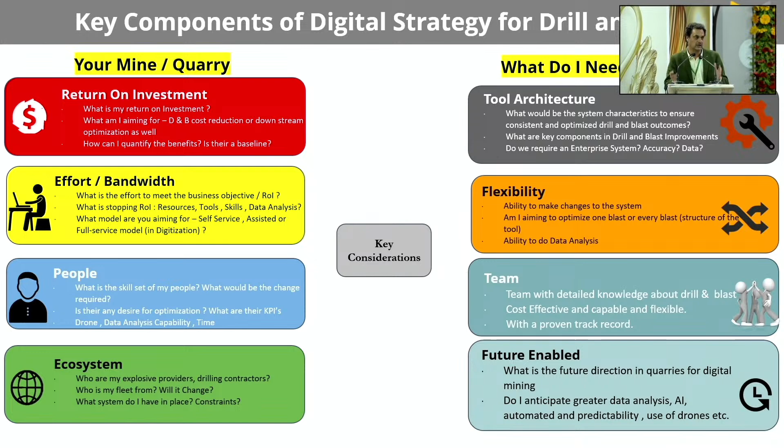So these are some key components of digital strategy. Return on investment, the proper efforts should require, we need to identify the proper people, the ecosystem - who are our drilling contractors, the explosive suppliers. We need to understand all of them, what are the constraints at the site. Then we need to finalize our system, what system we require that can give the benefit to us.

Now we will talk about the digitized drill and blast platform. As far as what we are currently doing, we are just following the current patterns, whatever is there. No drill and blast design, new innovations are very less, and we are not considering the proper rock properties due to certain reasons. So we need to consider all of them.

So in future what we can do, we can consider the geology of the rock, explosive properties, and the design should be based on all these factors. Then at the same time of design, if we can check our outcomes - like vibration, in some cases the vibration is going beyond the limit, the nearby villages are there - we can check how much vibration we can get, control it, and improve safety also. In case of fly rock, fragmentation, each and every aspect, all outcomes we can check while designing through our platforms.

You can see the drill and blast cost is very less compared to the overall mining cost. So we are not saying that we will reduce the drilling and blasting cost. We need to optimize this system because all the downstream operations depend on how your blast is performing. So our main aim is to minimize the overall mining cost, optimize our drill and blast operation, and control the environmental impacts due to the blasting.

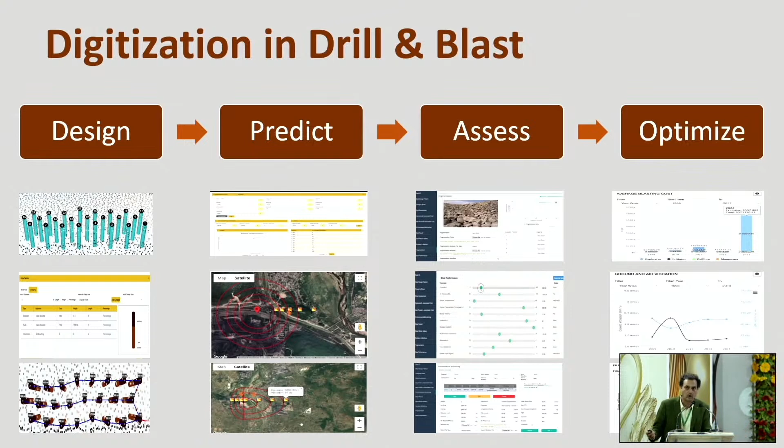So in our software we are providing 3 modules. Blades - in that we can design a blast, and while designing, as I told, we can predict the fragmentation, ground vibration, air vibration, and if any parameter is going beyond the limit, then we can change certain parameters and get it within the limits.

Then after the designing, the blast drilling operation can be monitored in the DRIMS software. After completion of the drilling, again we can generate the charging sheet through the BLADES software, and post-blast record - all blast records can be kept in the Blast Information Management System, BIM software. So this is covering the entire blasting life cycle - you can design, you can monitor, you can keep the record, all at one place.

This is a higher level integration. You can see we can design and directly export the coordinate of the hole to the drilling rig, and if the drilling rigs are capable of drilling with accuracy, with a high precision navigator, it can drill without intervention of any measuring burden and spacing anything. Then we can monitor whatever drilling information, all the information through the MWD data we can collect.

We can design our charge according to the hardness of the rock, and after designing the charge, the charging sheet can be directly exported to the explosive truck, and the truck can deliver the explosive exactly at the particular hole we have designed. I am feeling proud to announce that this system we have already implemented in South African coal mines.

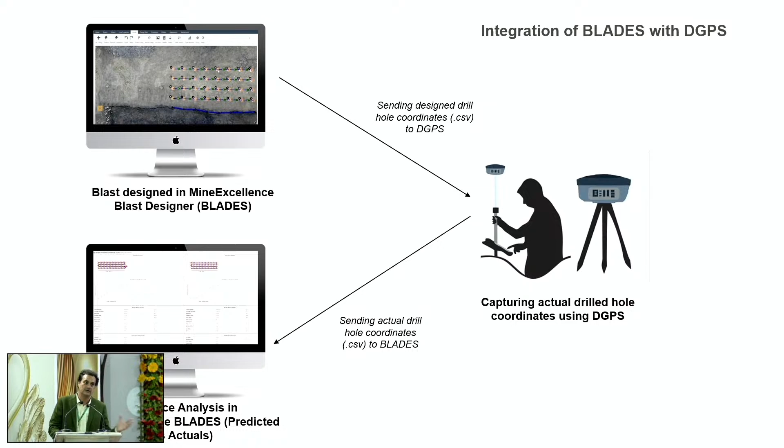This is a very good system. If we know how much we have deviated, we can control over them, and based on the deviation we can generate the charging sheet accordingly. Whatever variation, whatever changes we require, we can do it prior to the blast.

Front row burden - this is a very important thing. It is more responsible for fly rock and for utilizing the proper explosive energy. Now in present practice, we are just identifying manually how much the crest toe is, and how much the front top toe burden is.

Then we are adjusting our hole. But in this system, by just clicking on your hole, at intervals of 5 meters you can get how much front burden is there, and accordingly we can place the charge.

In some places undercuts are there, so maybe fly rock is the main cause of that. We can avoid it by putting some decking, and at the bottom put some heavy charge, adjusting our hole accordingly. We can set our minimum burden and maximum burden in the software, and then the software can auto-adjust the burden in the front row.

Time window - in the case of non-electronic connections, each hole is thought to be blasting at a time, but whatever holes blast within 8 milliseconds, researchers tell us it will generate the same vibration effect as if they are blasting together. This time window clearly tells us what is what. Here you can see a maximum of 4 holes are blasting altogether within 8 milliseconds.

So if we are more vibration cautious, if any nearby villages are there, we can check at each spot and change the delay, and reduce it to a single hole blasting within 8 milliseconds.

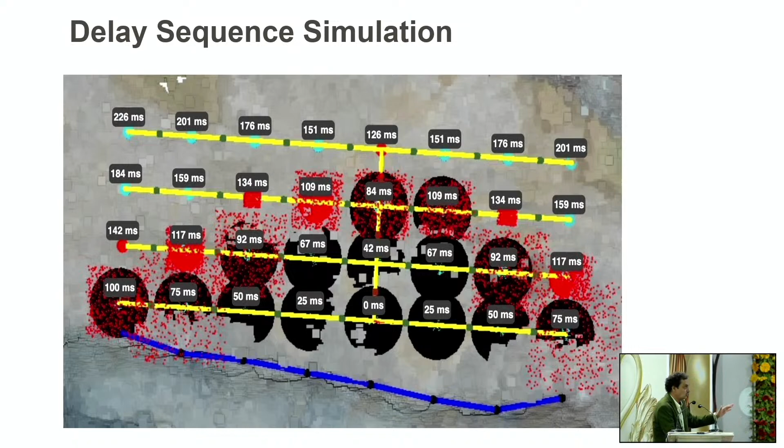The time contour shows in which direction you want to move your muck. This is very important for ore dilution also - we can control in which direction the free face is available, where we need to move our muck. That can all be adjusted prior to the blast, and that is the important thing.

There are some case studies from Indian coal mines only, but presently we are working here, so we are interested, we are working with your expertise team, and we will make a case study like that, where we can show the case studies of the local mines, how much we can save.

So these are some operational benefits. Beyond the operational benefits, we are improving safety also. We are controlling the environmental impact also, and cultural improvement is also there.

So I would like to thank NCL, SCCL, Coal India, Accenture for awarding this contract to us, and we are implementing this at all 7 mines, and now we are committed to the successful implementation of this program, and hopefully we will implement it in all Coal India mines. Thank you. Thank you.

Next speaker's topic is advanced technology in SLI enabling safe working environment. Hey Bhartu sir. Yes sir, as the topics are different, can you put a question answer immediately after the topic? Okay sir, so any question related to this paper?

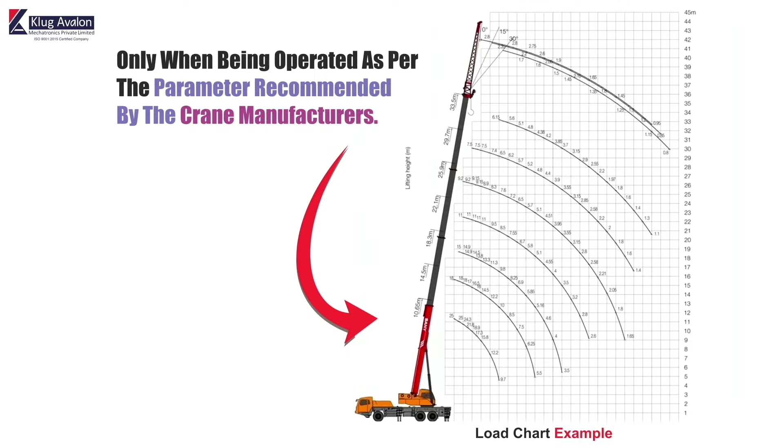When all these parameters are followed as per the load chart provided by the manufacturer, only then is the crane safe. Can this be judged by an operator? The answer is no, because an operator cannot judge the radius, the actual load he is lifting, the safe load it can lift at that radius, or at what angle he is lifting. He is not able to judge all these parameters by himself.

So what is the solution? This incorrect judgment can lead to loss of human life, damage to the crane, and damage to the material. And when he is not in a position to judge properly, his efficiency and productivity also go down, because he is judging everything himself and probably those details are not with him.

So that is what we are providing solutions for. Crane operation depends on the operator's judgment, which may or may not be in line with the parameters decided by the crane manufacturer. So what is the solution?

That's why we have various sensors, and a display mounted inside the operator's cabin, where he can see all the parameters given by the crane manufacturer, such as boom length, the radius at which he is lifting the load, the boom angle, and the exact load he is lifting versus the safe permissible load at that radius. All this data is displayed, so the operator is very confident while operating the crane or any lifting equipment.

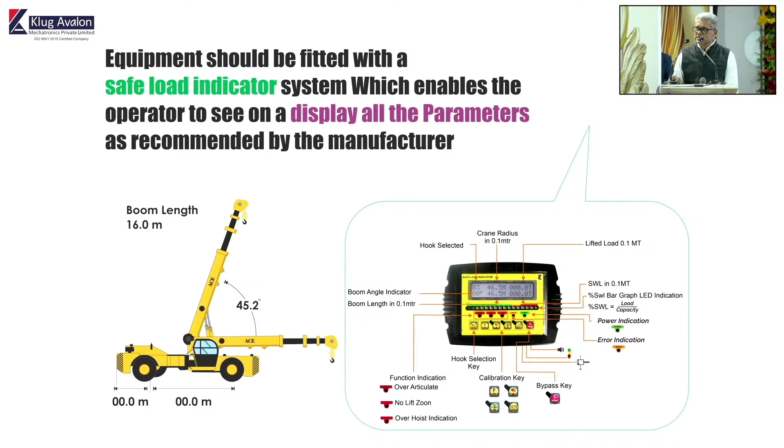This basically enables him to have a very safe operation as designed and described by the crane manufacturer. We are working on various other solutions also for excavators, front end loaders, and onboard weighing, but it is under process. Maybe in 6 months or a year we will be able to offer all those things to our customers.

This is our factory with various sensors. One thing I'd like to mention is all these sensors are developed, designed, and manufactured by us in-house. I'm showing all the different sensors we manufacture.

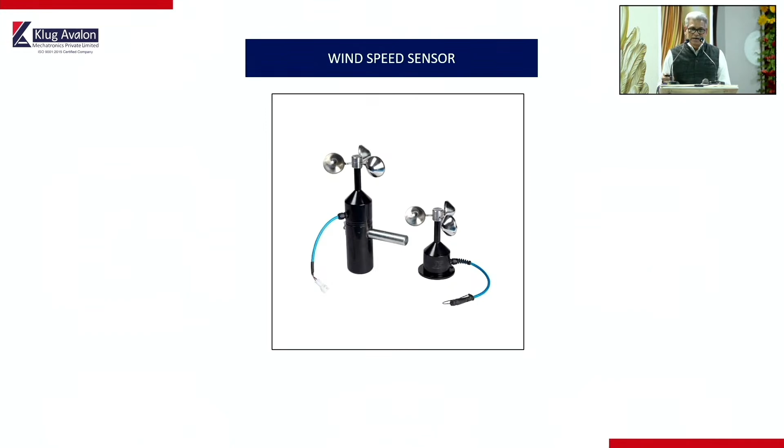These are used for different kinds of applications: this is a load, length, and angle sensor. Wind speed sensors, because for many tall, long-boom cranes wind conditions matter, so we provide wind speed sensors too, along with limit switches.

This is the HMI display I already showed you, and this is the big display we provide for EOT cranes. Right now we're talking about mobile cranes mounted on tires or crawlers, but we can also offer solutions for EOT cranes, gantry cranes, and forklifts.

For such cranes we use these big displays, which enable the operator or anyone operating the crane to see the exact load being lifted and whether it's within permissible limits. When an overload condition occurs, there's also an automatic cutoff system so that overloading is avoided.

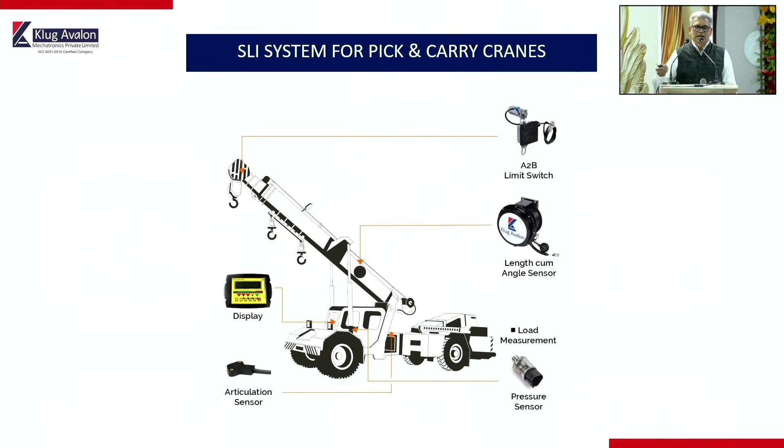These are the various cranes I'm showing. This is a pick and carry crane, mostly popular and used in Coal India and similar places. These are truck-mounted cranes, also called truck cranes or telescopic cranes. We have various solutions available for these.

We offer OEM supplies as well as retrofit solutions, because many old cranes are fitted with imported systems. We can replace these with our indigenous system, which is very cost-effective and can support you for 8 to 10 years without problems.

Crawler cranes, this is a tower crane. We can also provide solutions for forklifts. These are the EOT systems I mentioned, and we showed the gantry crane design, but this can be used for EOT cranes as well. This is an EOT crane.

Someone just now spoke about IoT. We have systems where you can get all the data on your mobile phone. We have developed that kind of system too - you can see the data yourself on mobile and put it on the cloud. So you have accessibility to the data also.

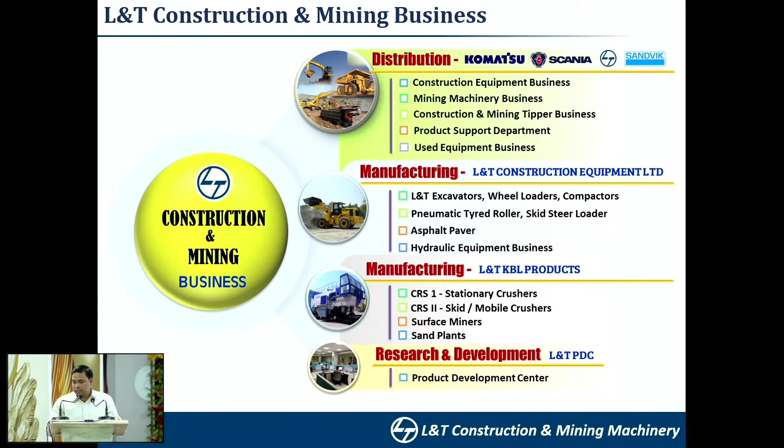We are offering Komatsu machines to NCL. We are procuring these machines globally, from major locations in Germany, America and Japan.

This is our comprehensive range for the Komatsu equipment we are selling in India.

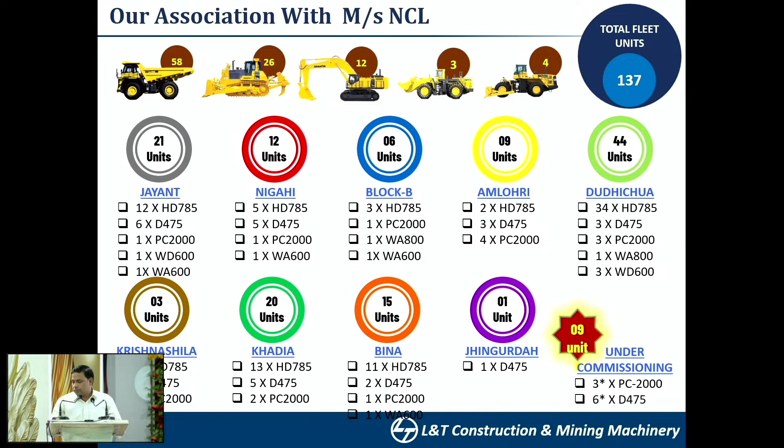26 dozers are operating in NCL, and 58 dump trucks are operating in NCL, which have the highest SMR of 40,642, with an average availability of 93%.

This is the inauguration ceremony at Amlohri project, which we have recently done.

This is Dudhichua, and this is the machine which was supplied first in NCL, which has crossed 65,000 hours, a benchmark for us. We would like to thank you, especially NCL Gorbi and NCL, for providing this opportunity and taking care of our machines.

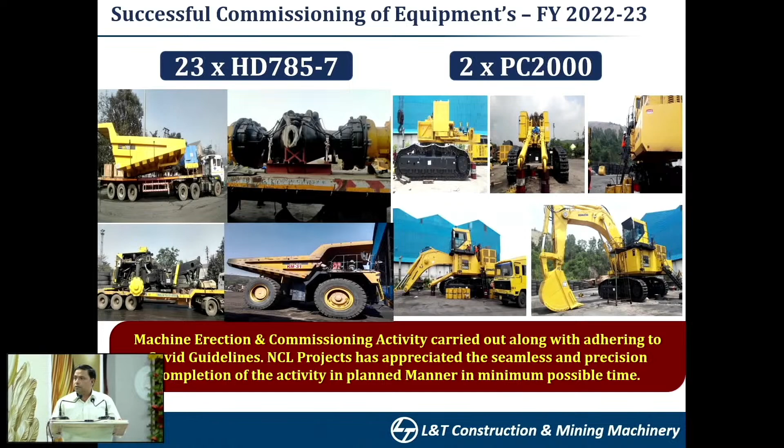Recently we have handed over 23 dump trucks and 2 PC2000 machines in the last financial year. Now we are commissioning 3 more PC2000 at various projects.

What facilities do our machines have? Onboard monitoring - if any fault arises in our machines, an engineer can go and do the monitoring on the screen. That is called onboard monitoring.

Komtrax Plus - we also have remote monitoring, this is vehicle health monitoring. We can take the data, download and analyze it automatically. We also have Komatsu oil wear analysis, which we do on a regular basis on the machines.

This real data is for operational improvement, for our mining tool, the mining operation tool. Komatsu undercarriage maintenance we do on a regular basis to predict the life of the undercarriage and avoid delay in part supply.

This is the sample for the equipment care which we are doing, based on data from the VHMS.

For the best parts availability methodology, we did a contract with the OEM called MDA. Through that, we have reduced the time for supply of parts and the procurement process also.

Various service contract options are available, like MARC, FMC, AMCs, parts contracts, rate contracts, and depot agreements. Various Komatsu tools which are very helpful for maintaining Komatsu machines - VHMS, KOWA, KUC, PM Clinic - we perform these on a regular basis on our machines.

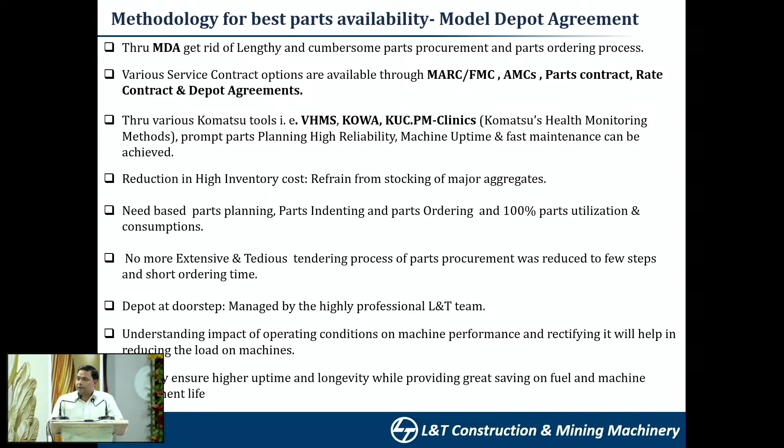Benefits of OEM based annual maintenance, as we are running with some contracts at NCL Gorbi, NCL Jayant, and some for NCL Bina also, where we are providing annual maintenance contracts.

For that, which kind of benefits does the customer get? 24/7 service they get from our side. In time parts planning, indenting, tendering, ordering, MDA, rate contracts, all done.

Deputation of model-wise product specialists. We have a product specialist for each machine who is very concerned about the machines. Model depot agreements with OEM for faster parts procurement and annual maintenance contracts with the OEMs. Doorstep availability of the OEM depot, as we have our depot very near Waidhan, close to NCL, from where we supply parts in a much lesser time.

We also have some advanced technology such as vehicle health monitoring system software, Komatsu oil wear analysis, Komatsu undercarriage life expectancy mapping, tire pressure monitoring system, rear view cameras, proximity sensors, anti-collision system, auto fire suppression, auto greasing to all critical areas, automatic payload monitoring system, and conversion kits.

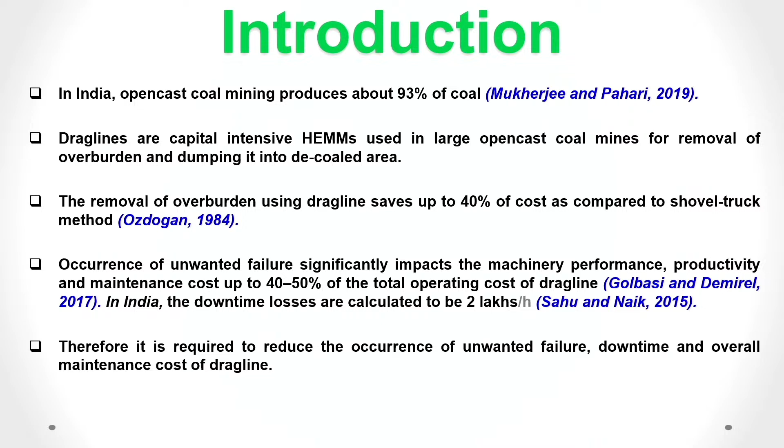First we have to talk about India - everyone knows that 93 to 95% of coal extraction is done by Opencast mining, and dragline is heavy, costly equipment, but it is the cheapest machinery to extract minerals, and it can save 40% of the cost as compared to dumper-shovel combinations. One case study reported that the total maintenance cost of the dragline is approximately 40 to 50% of the total operating cost of the dragline, and it is counted that the hourly loss of the dragline is approximately 2 lakhs. So therefore we need to predict the occurrence of fault and failure of the dragline to minimize downtime and overall maintenance of the dragline.

So now, everyone discusses Industrial Revolution 4.0 and everything, so we should discuss maintenance policy 4.0. This is the present requirement for every industry, to make the equipment well and provide fast maintenance policy using artificial intelligence tools, that can develop an automated, self-learning system that can predict the fault, diagnose the fault, and trigger maintenance actions in real time. Maintenance policy 4.0 includes the view of source of data, way to connect, way to analyze, and way to recommend actions of maintenance that can improve the reliability of the equipment.

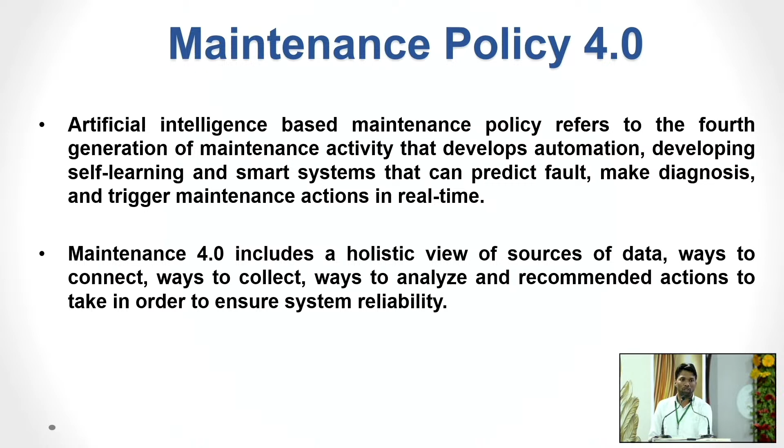In the real time condition, when we have to observe any evidence, that can directly feed into the network.

After that we have to do three different types of analysis: conflict analysis, sensitivity analysis, and fault type identification. In conflict analysis, when more than two evidences are observed at a time, we have to identify whether each evidence is supporting that particular part or conflicting with each other.

In fault identification, we have to develop reasoning to categorize the fault, like degradation fault or catastrophic fault. Sensitivity analysis is used to identify the most responsible parameter that affects, or is most responsible for, the occurrence of the fault.

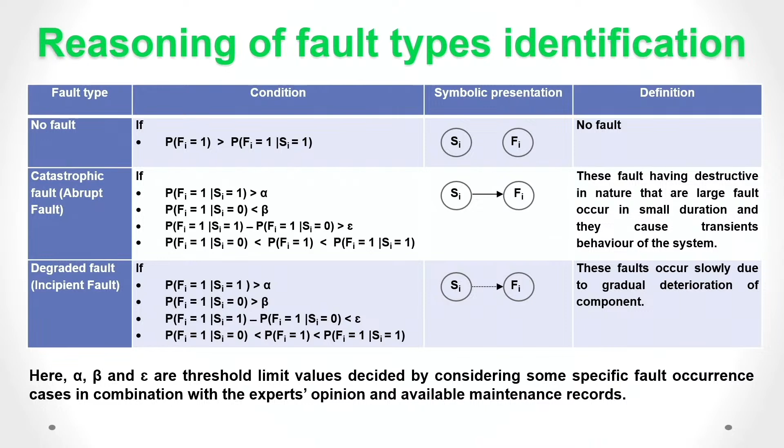When any type of fault occurs in the system, we have to do fault inference. So this is the reasoning used to identify the fault.

We have to develop the reasoning based upon the trial and error method. We give some random values, and based upon whether the real observations are valid or not, we have to decide the threshold limit that can describe the degree of detection of the fault, like alpha, beta, and epsilon.

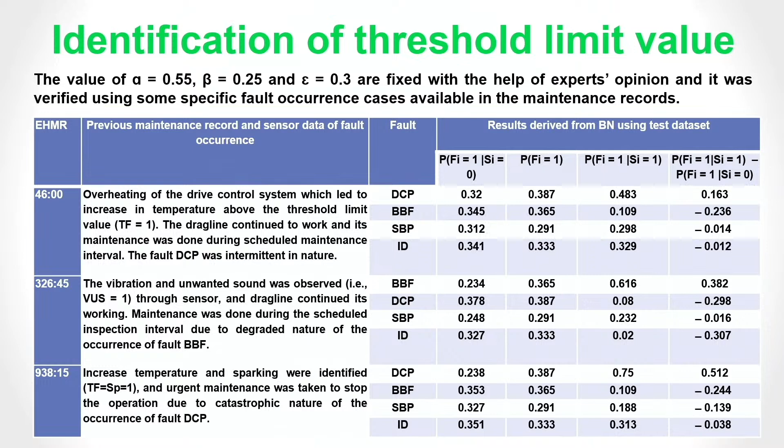After that, we have to validate the model, and in one of the cases we observed that one of the symptoms had to be identified.

Based upon that, we make a reasoning, and conclude that the fault occurring in the bearing is a degraded fault, and we suggest maintenance actions that can be taken within the PF interval, the potential to failure interval of the component.

A negative conflict value indicates the model is valid and the observed evidence is not conflicting with each other. Then, after doing the sensitivity analysis...

we have to fulfill 3 different objectives and identify the most critical parameter that can affect the occurrence of the fault. This is the objective that we have identified based upon that.

After that, we have to validate the model using the data set. One data set is used to develop the model, and another data set is used to validate the model. The percentage of accuracy of the developed model is 92%, and the error identified is 9.20%.

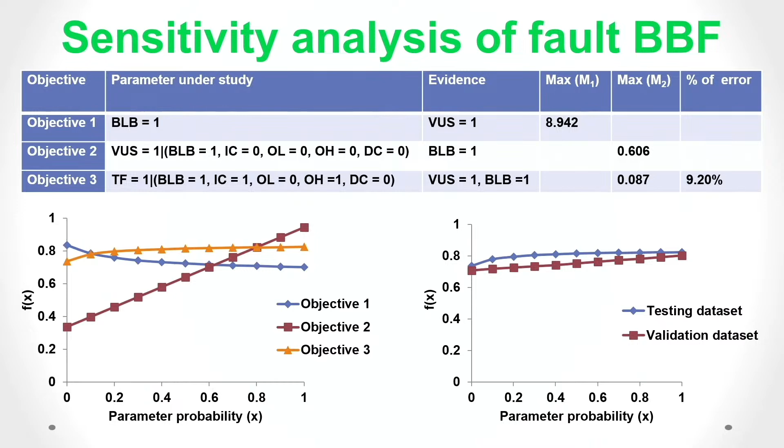So this is the conclusion. Based upon the fault type categorization, we predict the fault either as catastrophic fault or degraded fault. Based upon that, we take maintenance actions, and sensitivity analysis can be used to identify the most important parameter responsible for the occurrence of the fault.

After identifying the fault, we have to develop a decision support system that can decide whether to continue operating the dragline or discontinue operations.

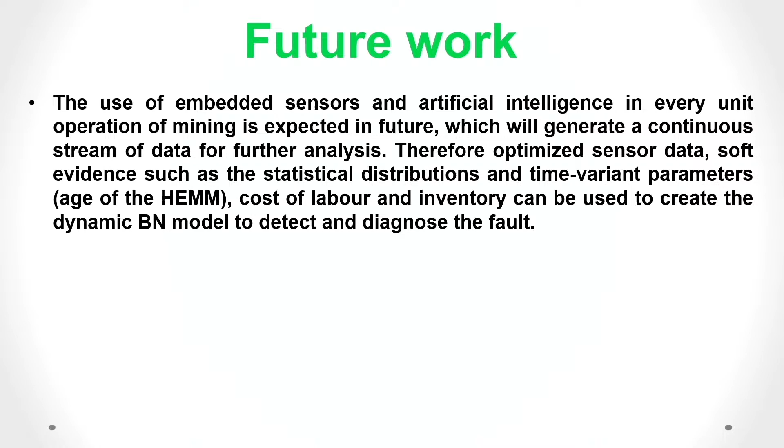Thank you. Any question? No, thanks.

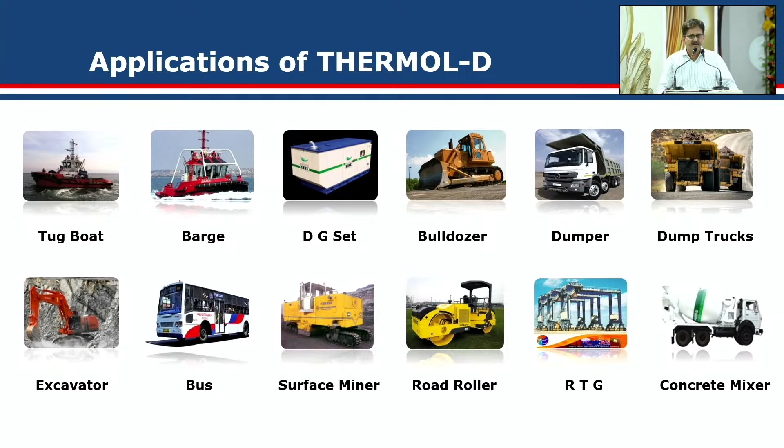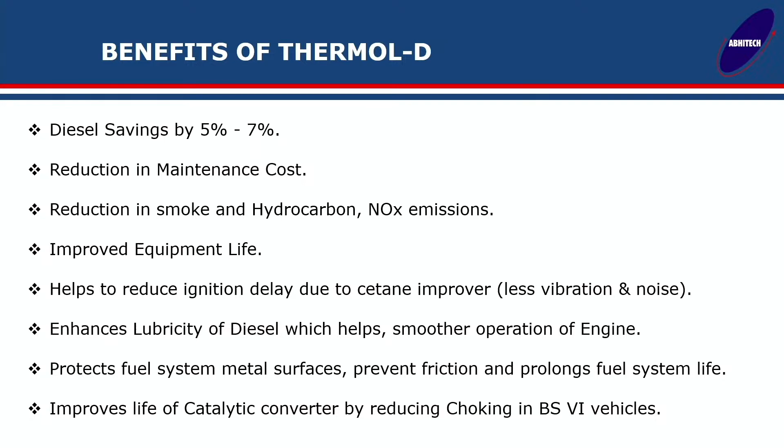These are some of the OEM certificates. From BEML, the product has been tested at NLC. Then from Kirloskar Oil Engines, and from Wärtsilä, Finland.

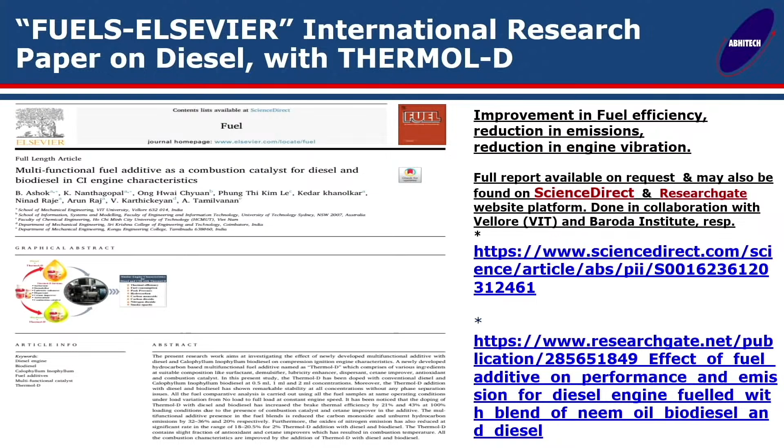There's also a prestigious journal called Elsevier, where students from VIT institutes conducted experiments with our product in a diesel engine, and it was published in that journal about 2 years back.

This is from MCL Mahanadi Coalfields. They have been using the product continuously for the last 3 years. This is Samleswari mine and Lakhanpur mines, where different equipments have been tested and fuel saving has been achieved.

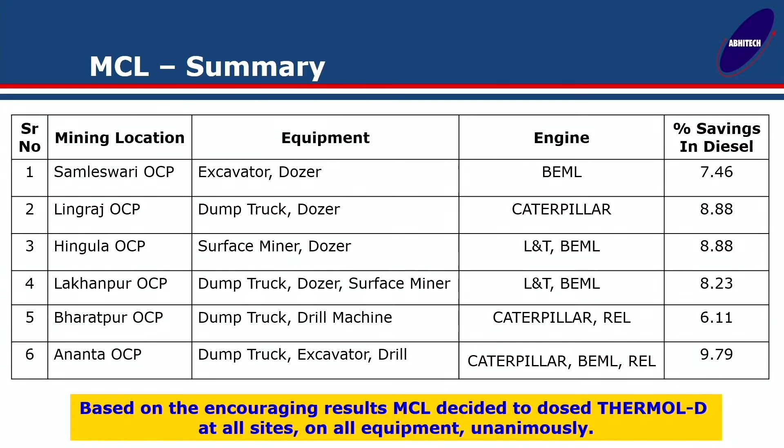This is from various equipments which have been using the product here for the last 2-3 years. As I said, all the mines are using the product, and these are the reports from the control testing.

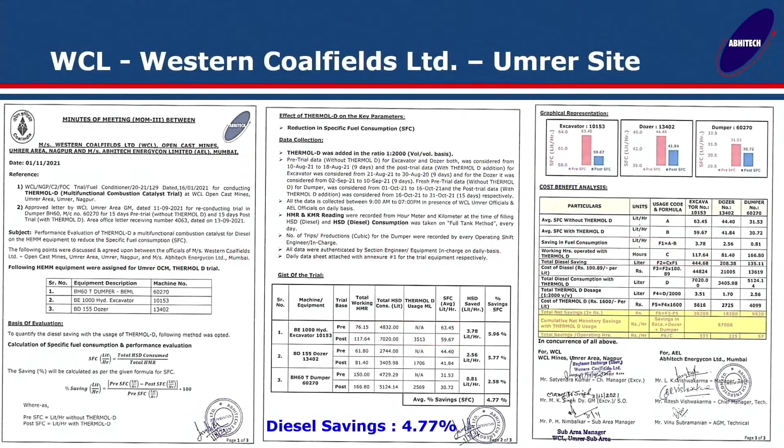This is from WCL, Western Coalfields Limited. We have conducted these trials at various mines. This is from Umrer site, showing about 5% diesel saving in controlled equipment.

So regarding the cost of the product - at the current cost of say about 100 rupees of diesel, our product costs about 2000 rupees. So there's a 1% extra cost increase, but even considering about 5% diesel saving, we are able to ensure about 400% return on investment.

In short, for about 10,000 kiloliters of diesel consumption, with the current price of the product and diesel, we are able to show almost 4 crores of diesel saving on a monthly basis.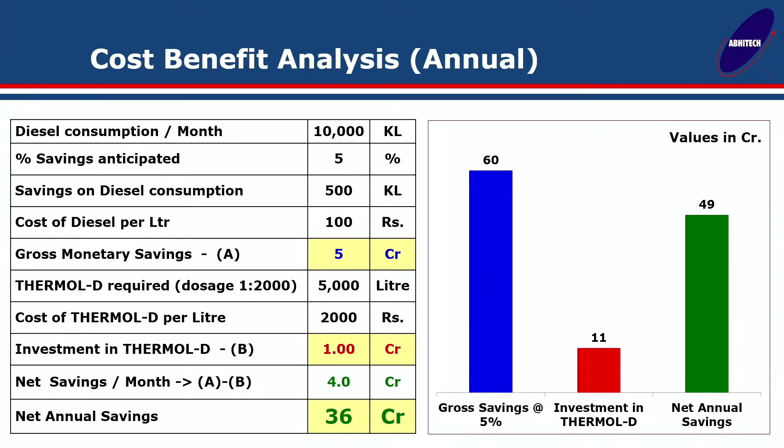It's all case studies, so... yeah, please move on, sure, sure. Just go through this.

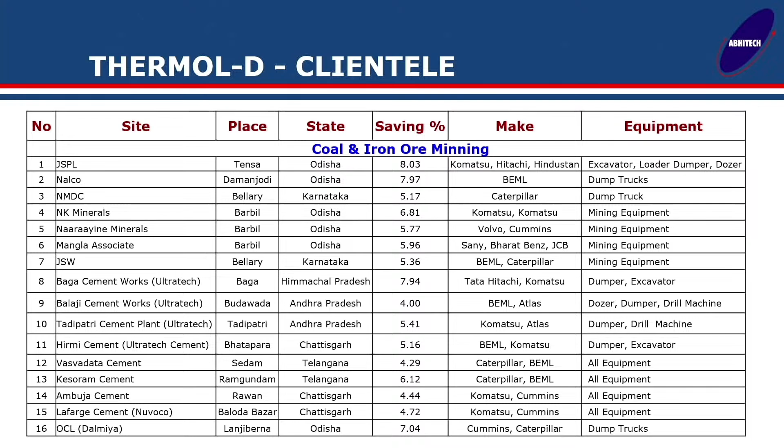These are the list of customers who are using the product for a long time across different kinds of equipments and heavy machinery, with various savings also being given.

Along with the product, we also give our 24/7 service. So this was a short detail of the product. Okay, thank you.

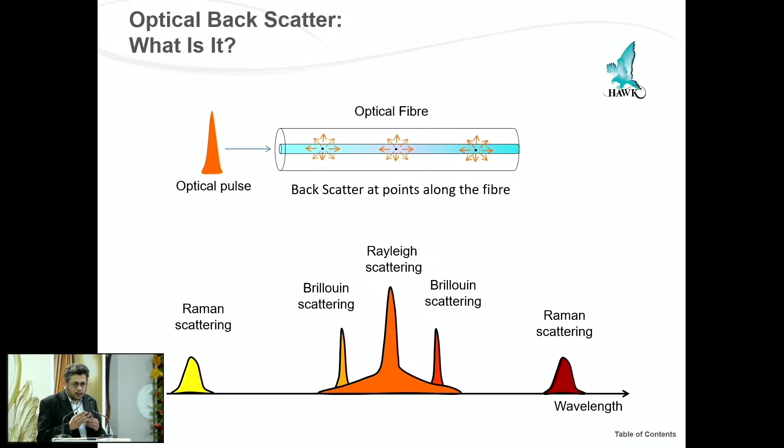What we do is pulse a controlled laser light inside the fiber, and the fiber has a property that when light travels through it, it reflects some of the light back to the source. We look at this backscattered light, pick it up, do an analysis, and based on the analysis and Brillouin and Raman scattering principles, we are able to identify the growth in strain of the ground where we are deploying the fiber.

This gives you some idea that there is a shift, and the shift is directly proportional to the strain that is developing in that area.

Practically what we are doing is we deploy the fiber on the benches based on the data that we collect from your field, put it in a geoslope software that we have, which does the analysis and gives us the failure line.

Based on the failure line, we decide the installation of the fiber on the field. Once the fiber is installed and the baseline is generated, we tell the system that this is your baseline or zero line. The system starts monitoring that mine or ground from that level and looks for a rise in the strain as and when it happens, stamps it with the time, stamps it with the geo or GPS coordinates for that matter.

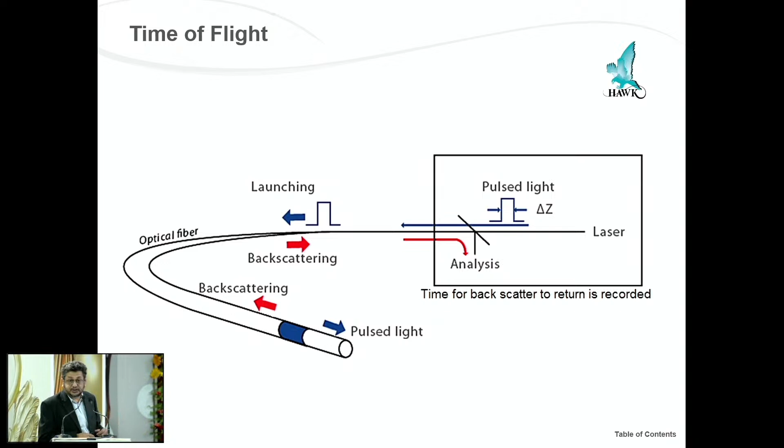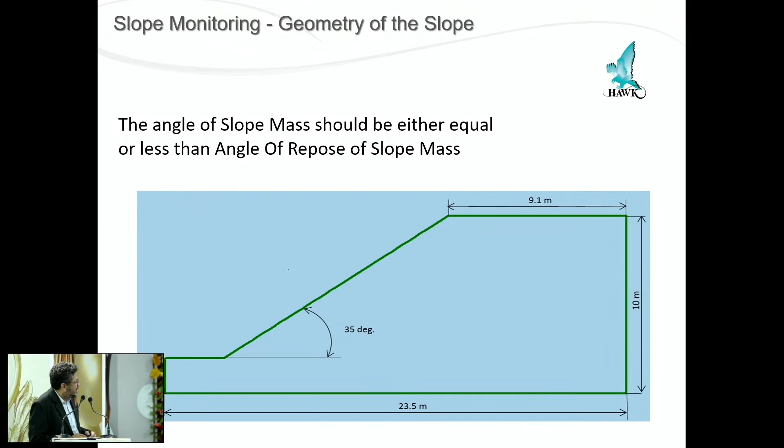This is a general diagram of the slope that is maintained or followed globally, and you have multiple of these one above the other. Normally this is the failure line that happens. For ease of understanding, I have taken only one slope or one bench to explain, but you will be having multiple benches, and when you add up these vectors, it gives you the actual failure line, which looks somewhat like this.

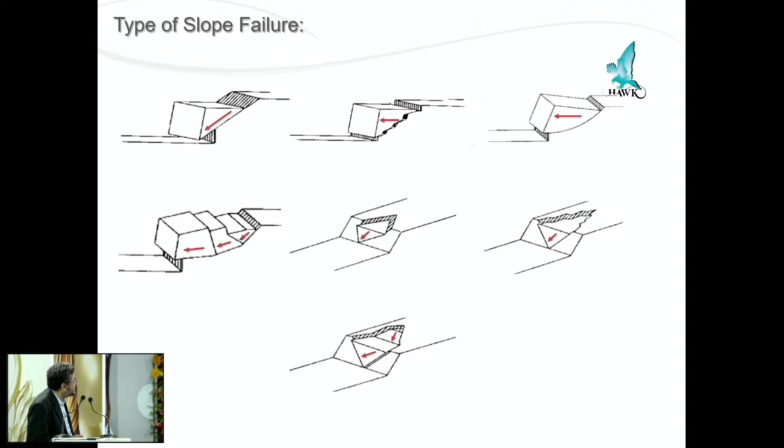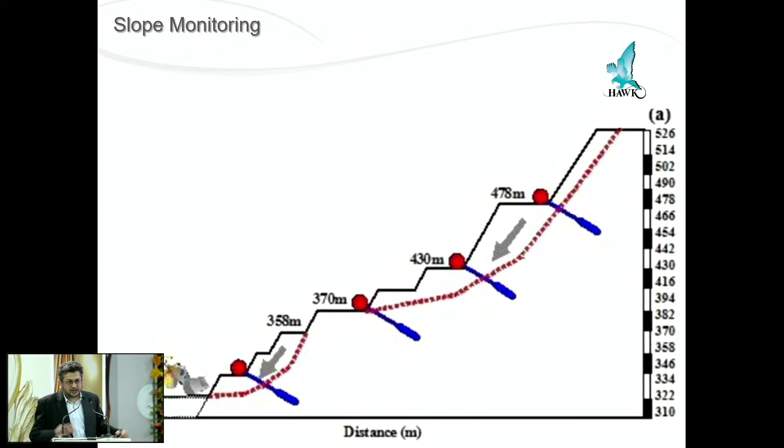This is something which the system comes out with, that these are the locations or the benches where you need to put the fiber in, so that you are close to the failure line and you are monitoring everything. So what we do is we drill a hole of around 5 meters, put the fiber in, bring it back, go around 50 or 100 meters, then again drill, put the fiber in, and continue with the number of benches that the software basically gives us indication for.

And it's all around across the mines, so you will be seeing these dots more. This is just one bench that I have shown, but these will be a jumble, it will be like a matrix.

What we are trying to do here is now to pick up the growth in the strain. So as and when there is a possibility of a ground or a mass of the ground coming down, the strain in that zone will increase, and we are pinpointing from where to where the strain is increasing. So we are not telling you that there is a possibility, we are telling you that this zone is going to come down.

Normally the product that is being used, because it's being recommended in one of the documents which says SSR, is the radar that people use. The best one available in the market is basically a Doppler radar. It's not the product, it's the principle which has the limitation. Doppler means it looks for a movement, unless you have a movement, it will not see.

We are trying to tell you before the movement happens. And this before is much before, so you have months before actually something moves.

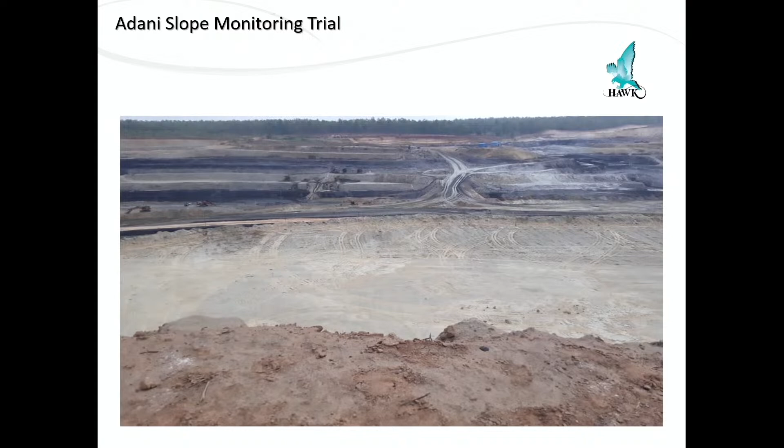You can't find where the fiber is. This was the control room, and what we did was we used the instrument. Two buckets were taken off, and we asked the equipment to push the ground so that it basically generates a strain. And when it started pushing the ground or the bench, you can see the strain started picking up. This is how the system looks.

This is the raw data that we are seeing, and you can see the start and the end of the strain that is being developed. We are giving you this location. This is the GUI that you will be seeing with the red pins which says that there is a high strain in the area, which also gives you the region.

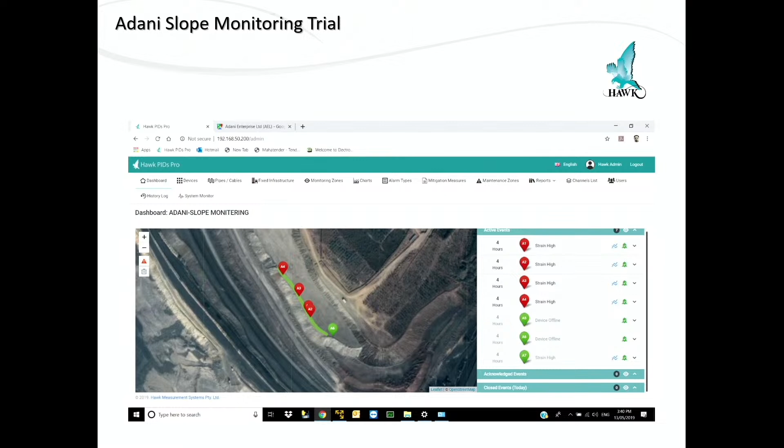A quick review of the methodology. This is the instrument that gets connected to the field fiber.

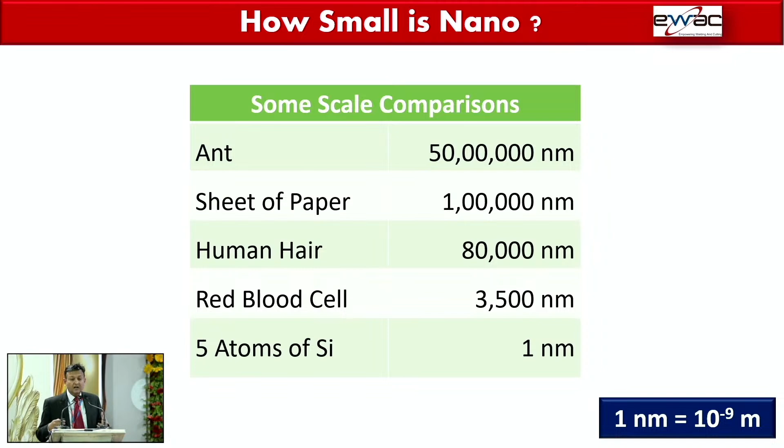Now, this is very metallurgical, because my background is metallurgy and I am doing PhD in management. So you talk about, Mr. Kaushik, requested to kindly concentrate on the product.

Yes, and now, what you are talking about - sir, my presentation is only on nanotechnology, so I am going to talk on technology. Products is very limited. So in nanotechnology, we are making the size of the small particles smaller.

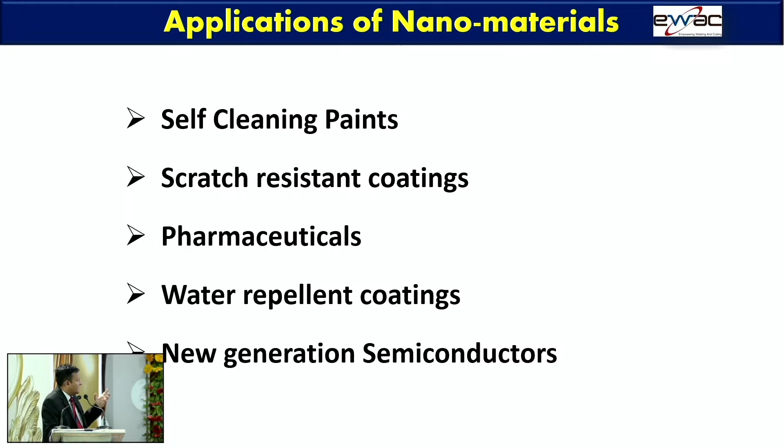Now what are the applications of nanotechnology? Any products which we manufacture in the field of welding, there will be no slags, there will be no unburned materials, there will be no slags available.

Now in the field of welding, I'll take very quick time. I have explained to you, we are using nanomaterials, rapid solidification, nanograin structures. I will straight away give the microstructure of the nanomaterials, which will be easier to understand.

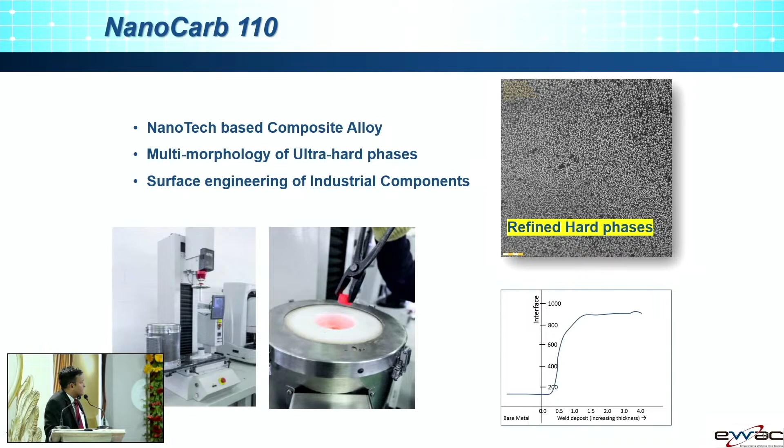Now you can see how you manufacture and what is the advantage of nanotechnology in the field of welding. Because of scarcity of time, I am not showing you a lot of things. This is the one slide which I want to explain to you, which any layman, welding professional or non-welding professional, or anybody will understand.

If you talk about any manufacturer of products today, if you take the microscope at 400 scale, you can see the microstructures. But just to see the nanotechnology products - anything in hard facing, joining, cast iron, wear plates - you have to see at 50,000 scale.

So ladies and gentlemen, that 50,000 scale - whatever products you are using today in the field of welding and cutting and wear protection, you can see at 400 scale, but there you have to see only the particle size at 50,000 scale.

So that's the benefit. Now how am I going to get the benefits? Let's talk about doing hard facing of a component. The particle size, suppose carbides I am adding, let's say 45%, but with nanotechnology you can increase up to 80 to 85%, and the life of the component from X becomes 2X straight away, because you are able to add a lot of carbides in the same volume fraction of the weld metal.

So that's the principal background of nanotechnology which I wanted to explain to you, because I don't want to talk about the products available with us in all forms. I want to talk about the technology, because this is a technology conclave.

Now you can see the microstructures - this will take you back to the slide once again. You can see the tiny small carbides which are embedded in the volume fraction, and you can increase up to 85% percentage of carbide just to get the life of the component.

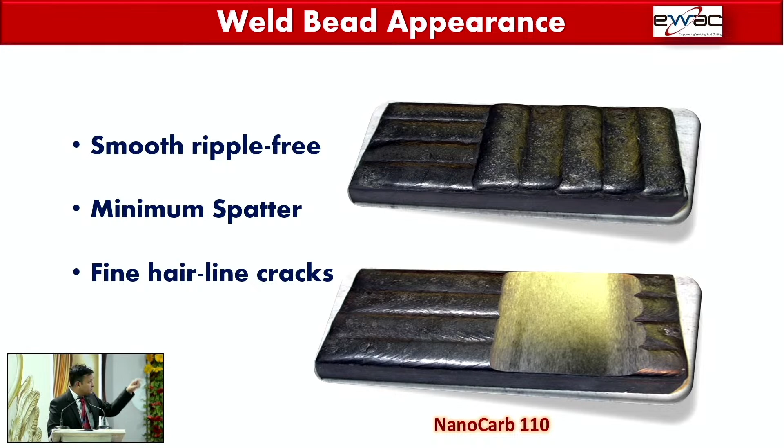So these are all - because I talked about the technology, I don't want to talk about the product, because technology will take you to the new platform, which your smartphone is playing today, which YouTube channel is playing today. That's the benefit we are going to get in nanotechnology.

Now, to take the hardness, you require such kind of instruments, and let me tell you, our R&D is the only R&D globally and country-wise that is approved all over the world for research and development purposes. We have all kinds of facilities, and this product has been established in various platforms across all the group of companies, whether you talk about Tata Group, SAIL Group, or NMDC. But in Coal India, we have limited presence for this product line, and we are taking turnkey maintenance because product is one part, application is a totally different part because of various commercial constraints.

So we do the turnkey maintenance of your shovels, dumpers, crushers, your chutes, modification of chutes, reverse engineering of chutes, any modification. Because let me tell you one thing clearly - anybody who is an OEM like Caterpillar, Gemco, L&T and all, they are basically not technology players, they are implementers in their fields because they are giving equipment. Our job is to extend the life from 3,000 to 10,000 to 20,000 hours. That's what our innovations are working upon, and we are working in that field.

So I request all the management of Northern Coalfields Limited to think upon implementing this technology in the field of life enhancement of the equipment. So with this, I come to the end of my presentation.

I would like to show you some of the live samples which have been developed for the industry, which can be utilized for your application - like you can see, these are the fans, mixture blades, edges, crush deck, all the applications it has been done for.

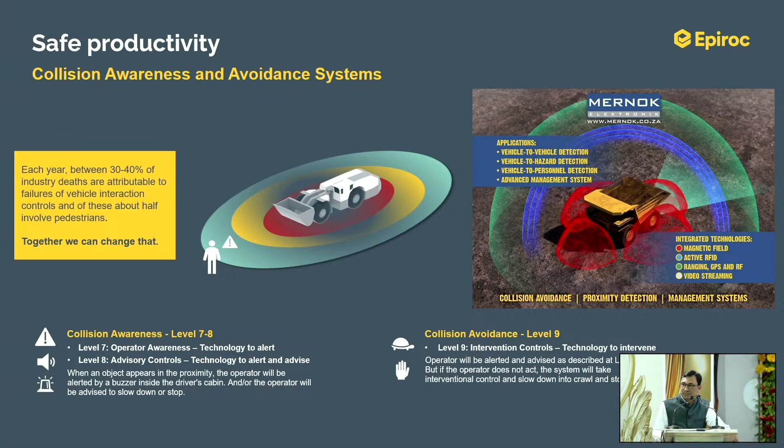Epiroc works in line with the Paris Agreement, and we have laid down our sustainability goals for 2030, wherein we aim to reduce carbon emissions from all our activities by 50% by 2030. All our products and services are aimed towards achieving these targets.

So you all know Epiroc. Epiroc is a company that is inherited from Atlas Copco, and we have a 150 year legacy. We are into construction and mining.

We have a global customer base. We are present in almost more than 150 countries.

Coming to the topic of digitalization and automation, why is it required? Because the industry trends and drivers are moving in this direction. Productivity demands have increased over the period, price of ore has increased, so people want lower cost of operations. The industry is shifting towards digitalization, and safety and sustainability are an important part of operations today.

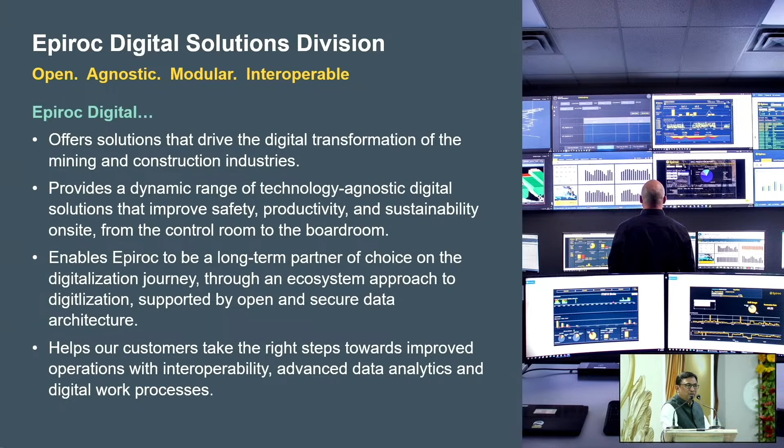Keeping in line with all these objectives, Epiroc has a lot of products on offer, and now to have a focused approach, we have a dedicated division called the Digital Solutions Division, which is in place to handle all the digitalization and automation requirements of our customers. We hope that with automation, digitalization and electrification, we'll have safer, smarter and more sustainable mining operations for our customers.

Although we've had this division only recently, it doesn't mean we haven't been in this era for long. It dates back to 1990, from where we started our automation journey, and with the acquisition of many companies in recent years, we have had organic growth and strategic growth aligned to our objectives.

So we have designed our sixth sense approach, based on people, process and technology. We work on three principles: insight, control and optimize. Insight means we collect data and help people make informed decisions. Control is optimization of processes, and optimize is basically once you've achieved all this, we improve the processes so that you gain more productivity outputs.

We expect that digitalization and automation cannot happen overnight. You cannot shift the industry 180 degrees. So we expect our customers will go step by step, and we would like to accompany them in the journey.

Of course, when it comes to data and information management, data security plays an important part, and we are proud to say that all our products and services are GDPR compliant. We ensure data safety and data security.

So if you see, we have a global presence when it comes to all the automation products. We are spread across all over the globe. In India also we have a presence at a few sites.

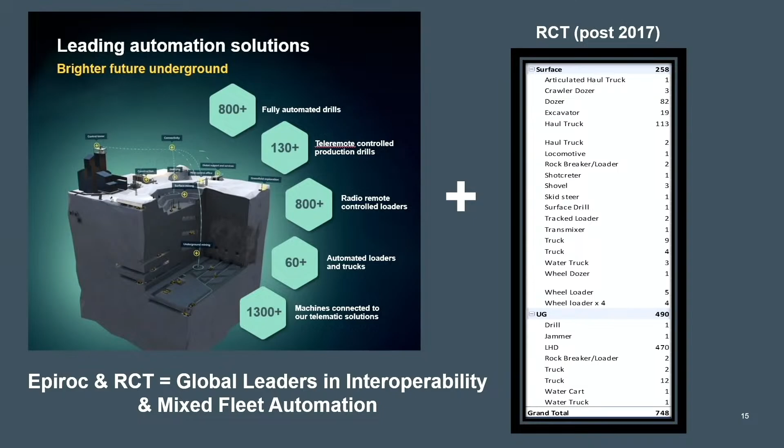If you look at our automation hours, combining all the automation activities of equipment working globally, we have drilled around 33 million meters in autonomous drilling, which means we have added 22% increased penetration rate compared to conventional drilling. We have also increased depth accuracy by 85% and spatial accuracy by 60%, which indicates that we have proven ourselves in the automation field in drilling technology.

I'll come to the solutions and acquisitions which are more relevant to Opencast mining. As I mentioned, our whole focus is on automation, digitalization and electrification, so all the acquisitions are aligned towards this.

Many world famous companies are now part of Epiroc, like RCT Global, ASI Mining, Redlink, 3DP, MineRP, all are now part of Epiroc. The purpose of showing this is that Epiroc now has the capability to provide end-to-end solutions to customers, be it networking, interfacing, or optimization. I'm just showing a few of the important companies here which are now part of Epiroc.

I'll come to a few products particularly useful for opencast mining. My Epiroc is a digital platform designed for our end customers, and it's role based, meaning every operator or person in the mine has their own user access. It's a fleet management system aimed at removing paper from mining, achieving all-digital mining through the My Epiroc platform.

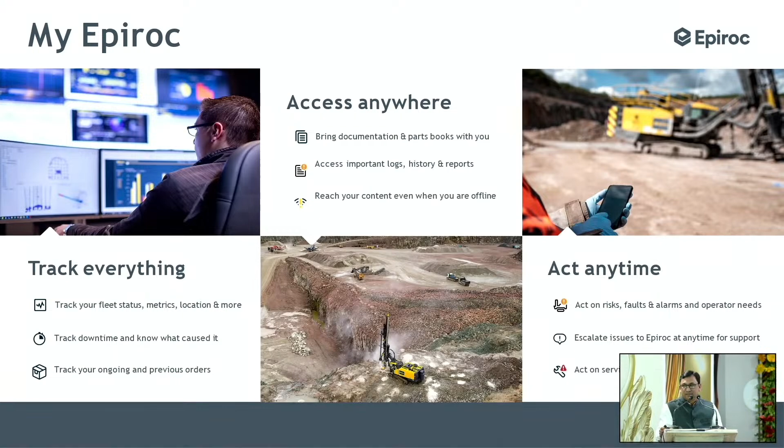It works on any device, from laptop to tablet, iOS to Android, so anyone with an Android phone can use My Epiroc. It's made for all applications, from surface mining to our partners and distributors. Everyone in the process chain, from operators to processing or purchasing managers, benefits from My Epiroc.

Fleet management is a tool in the My Epiroc digital platform where you can track all your assets. It's OEM agnostic, meaning you can connect all OEM equipment. You can customize your view, track the equipment timeline, see history, and achieve all paperless working through this.

Fault reporting - normally an operator reports the fault on the shift report and so on. All this can be digitized, and I'm proud to say that looking into the Indian requirement, we've made this even in Hindi language, so operators can find it easy to operate.

There are many inspections the maintenance team can do, and all the data is stored safely on the cloud. Even part books and manuals - no need to carry big printed part books - everything is inside your application.

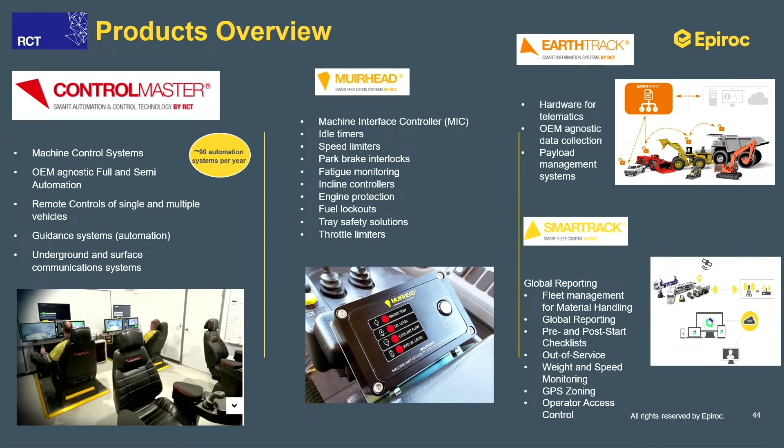We are proud to be associated with the biggest names in mining worldwide - you can see the names on the right hand side. Similarly, we are proud to be associated with various OEMs. You can see the many OEM equipments we have automated and given turnkey solutions for to our customers.

Just to give an example, from 2010 onwards, we have done almost 1400 automations worldwide. Automation has different levels - it starts from line of sight radio and progresses as we add complexity. We have AutoNav Plus, in which you can operate multiple fleets from a single person.

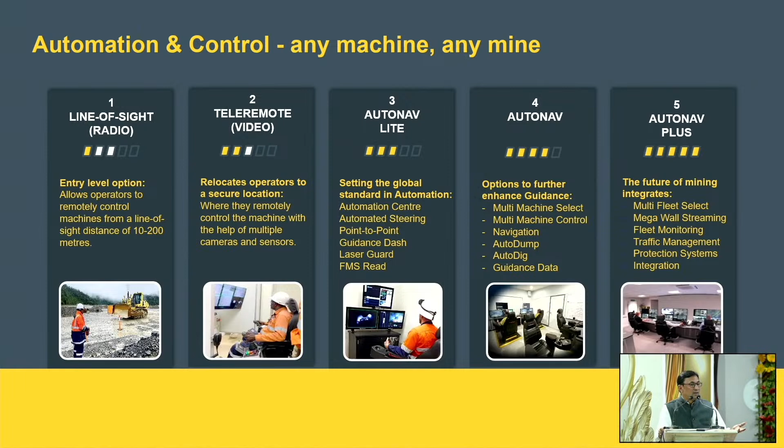As I mentioned, Mernok is a company into collision avoidance systems, and we have world-class products for this, even for surface mines.

RedLink is another company. With this we have solutions right from mines networking to all the infrastructure and hardware networks. Of course, it's not the only one. We have solutions in particular for Coal India.

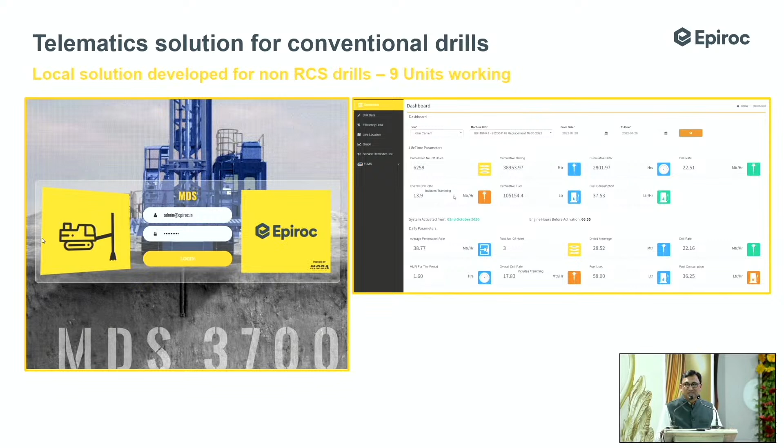We have the telematics solution which enables data from the conventional drills. In the previous session, people were mentioning that drills are not generating data. But with this, you can fit a retrofit kit onto the machine, and the machine will start generating data which can be shared to your ERP platforms or fleet management system. So all your DMH and IDM 70s can become modern, giving benefits for maintenance, operations, and monitoring and operator benefits.

I'll just show some examples. We have already run a few installations across India, particularly in cement and steel. Even for small contractor segments, depth measurement and fuel measurement are concerns, so we have some small scale solutions for them also, wherein you can get the actual drilling done from the contractor.

A few minutes before we were discussing angle drilling for DMH and why it's going to be important for NCL. We have a solution which can make angle drilling more suitable, because it is not possible to have exact drilling unless you have GPS coordinates. This system is a standalone system which works on GPS coordinates, and it is a non-intrusive mechanism, meaning it will not interfere with the machine, but it will give operator assistance to place the machine on the right track.

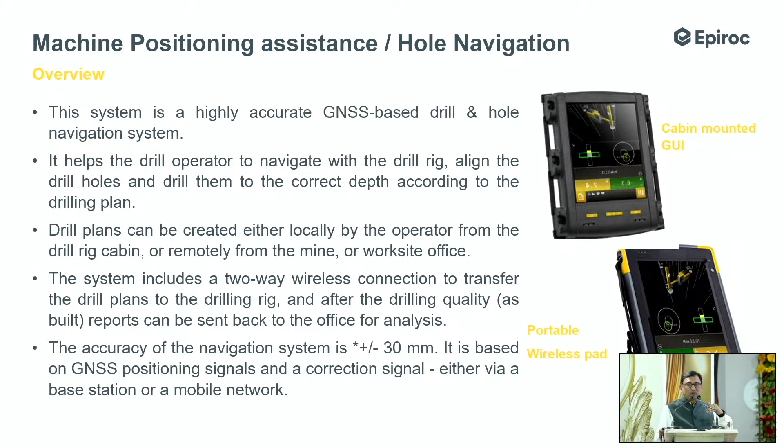So your drill plans can be remotely prepared and passed on to the machine. The machine will do the drilling as per the drill plan, and also give feedback back to the planning team. So angle drilling can achieve wonders with this system if implemented.

I think you should sum up now. HATCON is a system which connects breakers similar to the machines. We have auto level for DMH, so with a single click of a button, the machine can auto level itself, giving good results in terms of machine operation, drill tool life, and component life.

Thank you very much. Any questions are welcome.

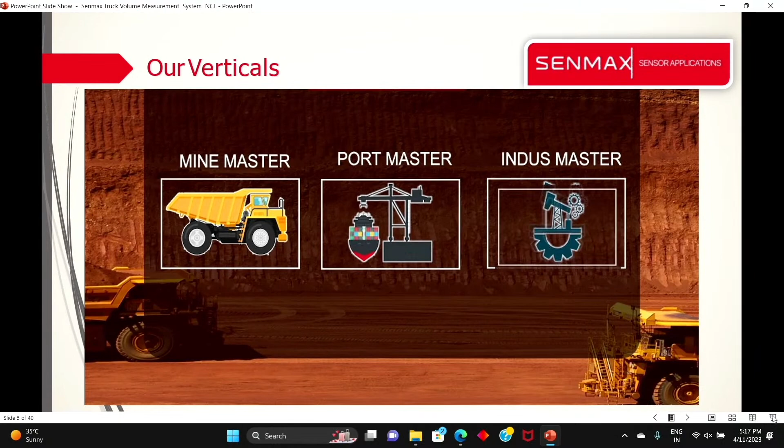Hope I am audible now. As I told you, we are into mines, ports and industrial equipment. So what we do is system data digitalization and volume accountability, dimensional accuracy, high functionality and easy operation, and obviously in the mines we need robust and rigid construction, lower power consumption and minimum maintenance.

We are into mines. For the first time in India, we have come out with a state-of-the-art product called truck volume measurement. It's a very simple application - like a street pole adjacent to the path wherever the truck moves. On the dynamic, it scans and gives the accurate volume at an accuracy of plus or minus 1, how much the truck is carrying. Similarly, we can do it for the wagon, and we can do the heap and conveyor belt, bunker volume measurement system.

Through this, we can give the proximity and create safer systems also for the higher vehicles. And when it comes to the port, especially for Adani ports, we have developed many products which may not be relevant here - truck positioning system, container, anti-container lifting and container handling, and container profile, etc.

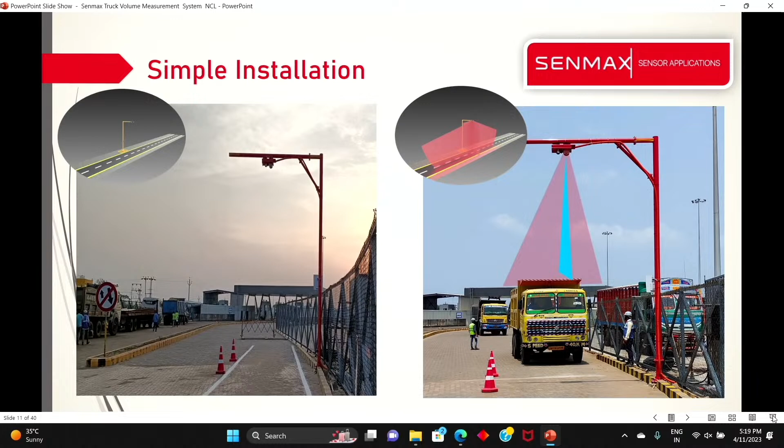As I told you, these are the original pictures of what is now operational at Dhamra port, that is Adani port. It is very simple, looks like a steel pole, and it can be commissioned within hours, and it can be removed and deployed elsewhere within hours. It will have 2 sensors - one measures the longitude and another the altitude, and there will be a camera.

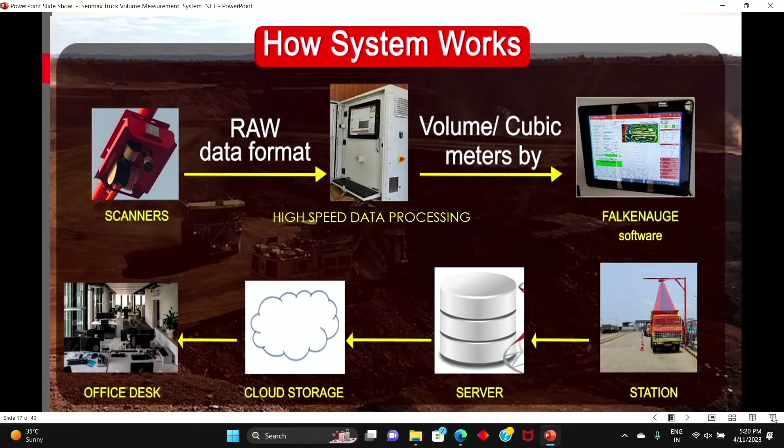The calculation is very simple. It creates the profile of the load scan - loaded scan and the empty scan. The loaded one minus the empty gives the cubic meters, how much exactly it is carrying. The raw data will go to the high-speed data processing system, and then our Falkenauge software will convert that into the cubic meter, and that will go to the server. From there we can take it to the cloud, and anywhere in the world we can sit and monitor the truck. So these are all many options available.

As for the customized data, we can give you the software. Mainly, right from yesterday, we have been talking about system data digitalization and OB accountability and real-time transfer on truck monitoring data, etc., where we can play the major role.

Another mission impossible what we have been talking about is the underload and overload of railway wagons. Within this 3-decade experience, we have come to a solution - it is ultimately a proven solution. It is a pitless static weighing system which will not disturb the railway track. We just fix our load cells underneath, and each and every wagon can be individually weighed, and there will be a jumbo digital display which can give the reading immediately, what is the exact load it is getting loaded. We can give signal lights also, color lights, whichever is comfortable to the operator.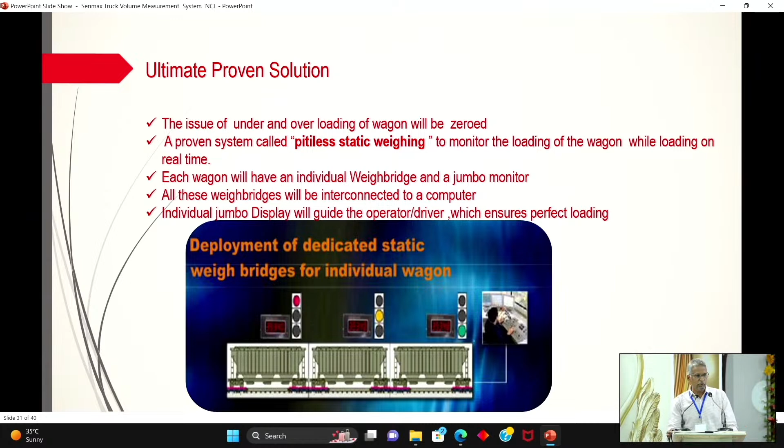This is how it will look like. This is a proven system, and it prevents underloading as well as overloading. These are our clientele, especially NTPC. We have given many systems, and we have given to JSW and Singrauli company and Adani also.

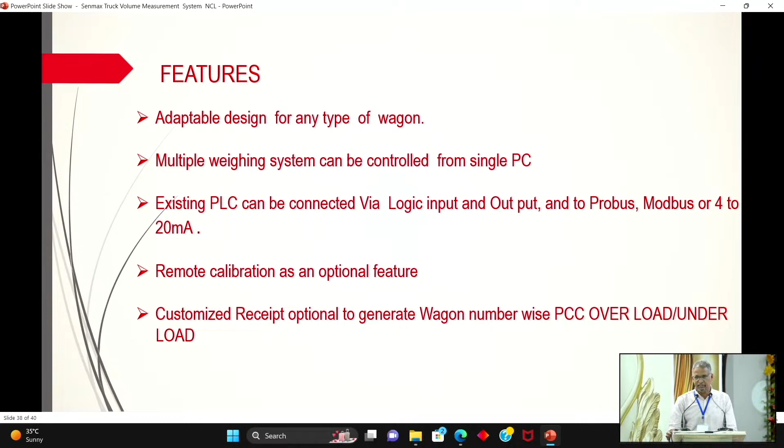This will give an adaptable design. This is very, very adaptable, and we can be very flexible based on the customized solution for the location, wagon and all that. It's an inbuilt surge and lightning arrester protection system, and this will not trouble anything, and this can take up to 150 tons per wagon. The accuracy we can give is 0.05.

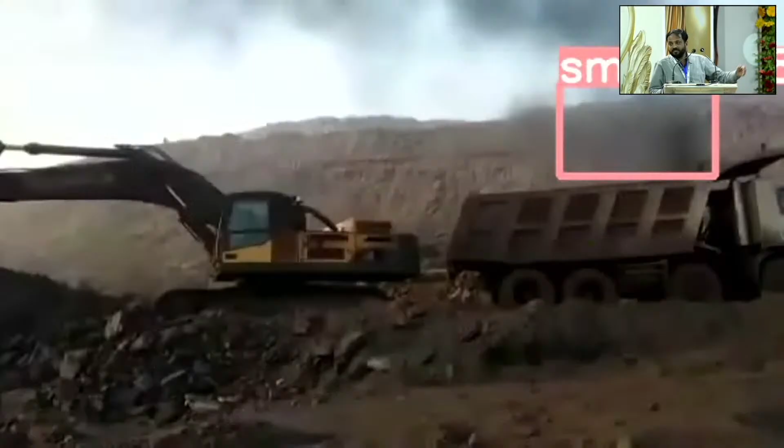In the current mine project, we have been doing fire and smoke detection, PPE kit detection, and vehicle detection.

We are currently working on the port side where we see a lot of dust coming out of the coal. We are able to detect whether the coal is covered or not covered, and we raise an event with the image and photo of that.

Also, in some areas, vehicles are not supposed to go faster than 20 km/h. We use a normal camera for this - it's a completely retrofit solution, we don't ask customers to change the cameras. We can deploy on the existing cameras. This is already running in NCL for more than 2 weeks now for various features.

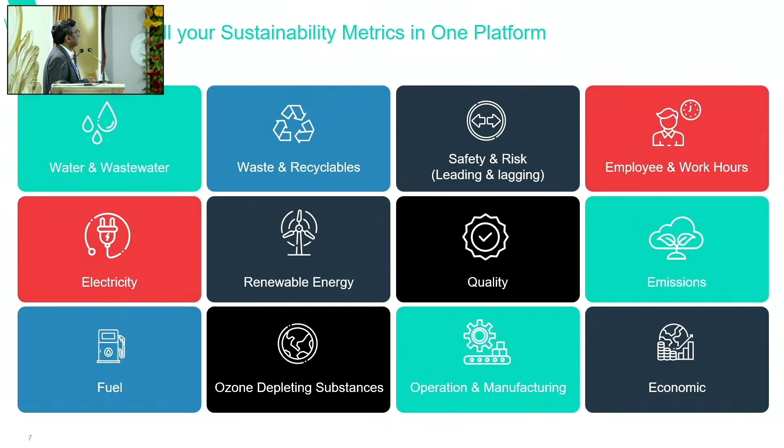Now when we talk about how do we achieve net zero, there are many things generating this requirement, like your water consumption, wastewater consumption, waste, recyclables, safety, employee productivity, electricity, renewable quality—there are a lot of things. From the mining perspective, all of these are getting generated in one place or another. So the challenge is how you get the data of all of these systems into a single place so that you can make decisions.

So now, what are the benefits of this digital platform we have at Net Zero? There are various ways of data accumulation through manual modes, real time, batch mode, and streaming mode. So there are multiple data entry modes available depending on your maturity of the process.

Then there is a lot of aggregation and normalization, because all mines may not be equal—so how do you normalize the data from one mine to another? Normalization is part of the process. There can also be automated data calculation or collection depending on the maturity of the process, and a lot of emission calculation. All of these things are important, and one very important thing is goals management. Because when we talk about net zero, we have to define the goals—for example, if you have to reduce carbon by X percentage, you take small initiatives, and to manage the performance of those initiatives, you need some sort of tracking management. So this is the overall solution.

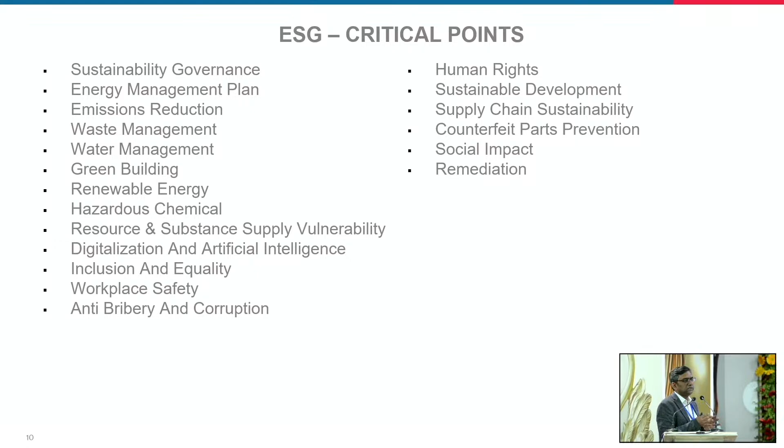So these are some of the critical points. I'm just going to take you very quickly through that, because it covers everything, right from anti-corruption, anti-bribery, workplace safety, inclusion. So there are multiple dimensions. There are 17 global indicators, and all of these initiatives have to feed into some of these initiatives.

Similarly, there is a sustainability governance that you have to set up in the organization. There is an energy management plan, an emission reduction plan, a waste management action plan. There's water management, green building certification, how much renewable energy, hazardous chemicals, and resource vulnerability.

I'm taking this very quickly because we have limited time. Ultimately, how are you looking at digitalization? Inclusion and equality is also one of the indices. Workplace safety - how can you monitor the data and make proactive decisions using it. Corruption, human rights, sustainable development, supply chain - it's not only about your organization but about your suppliers also. You have to ensure they are also following all of these guidances. That's a very important part of the entire ESG framework.

So now, how do you move towards that? First, you have to determine the capability - what is it we can do, what can we achieve in a defined time frame. We have to define the goals also, and define the reporting standard also, because if our goal is not clear, we cannot achieve what we want to achieve.

Then you have to do the materiality assessment, which is a critical part of the application. Materiality assessment means what is material to the organization when it comes to achieving net zero ambition. You have to define your KPIs and KRIs according to those 17 indicators, and define a roadmap, because everything cannot be achieved in one year - it's a long-term journey. You have to define your 10-year, 20-year goals aligned to that.

Then you have to define what sort of data needs to be collected, from which sources, by what method, and how you build your reporting and dashboard from the ESG perspective. I'll skip through this part. So these are the 17 indicators - when you have this application, all of the initiatives you take will contribute to one of these goals, and you measure performance against these 17 indicators.

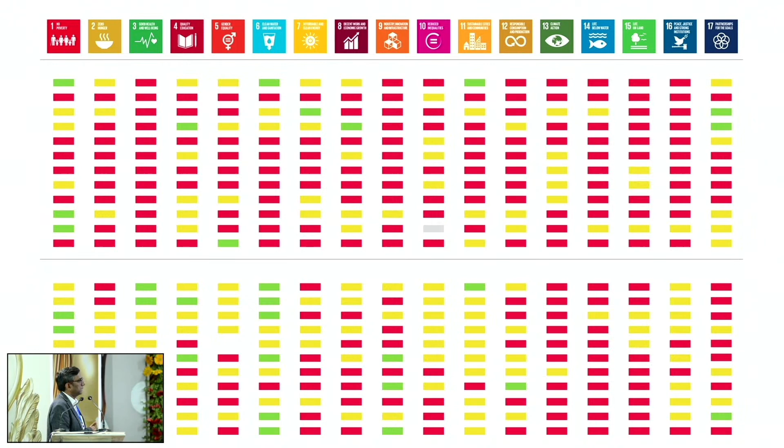So that is what I had to show you. Thank you very much for this opportunity. Thank you, sir. Thank you.